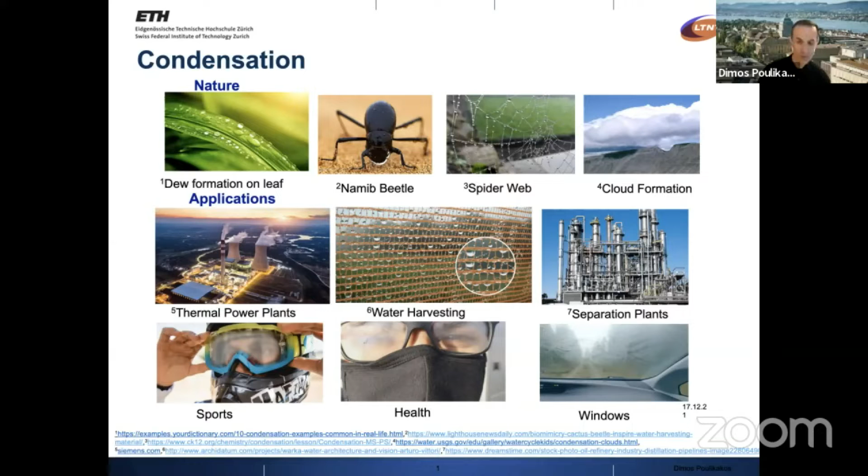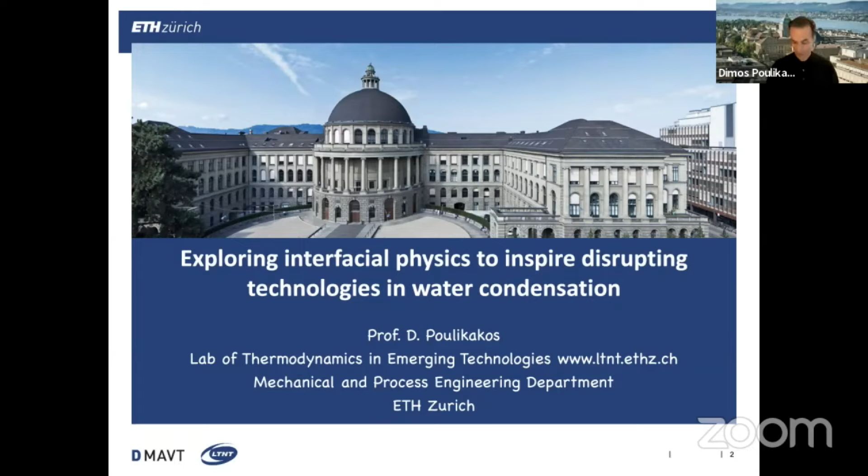Therefore, in today's talk, I will discuss the physics of condensation and how we learn from that physics to develop effective technologies for water condensation. I have three aspects in my presentation. The first deals with the broad area of power generation or industrial condensers, where the goal is to maximize heat transfer during condensation, and the mode of heat transfer that allows this is dropwise condensation.

The second topic is a completely different application. It refers to the big problem we have now, and will have more of in the future, of water scarcity on the planet. Here we see how we can utilize water in the atmosphere, harvest it, and combat this issue.

The last problem is one where condensation is really not wanted, but we have it whether we like it or not, and that is condensation on objects we want to remain transparent. There I will show how we develop technologies that ameliorate or avoid condensation.

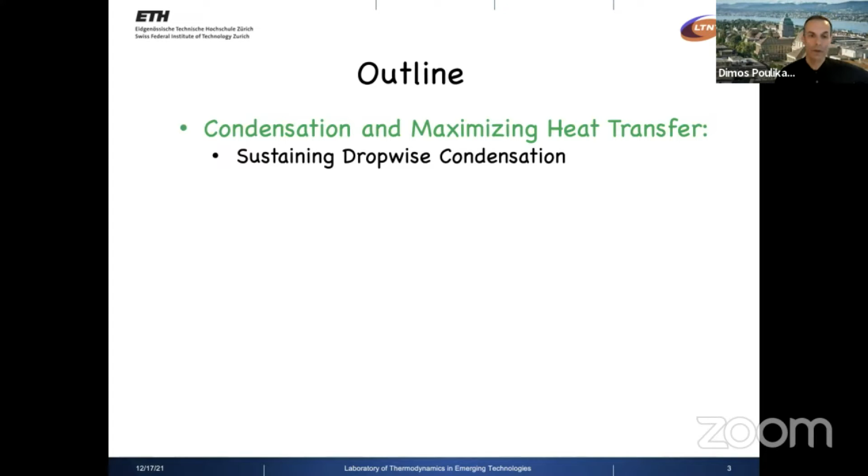So let's start with the first topic, which we're all familiar with in the general area of heat and mass transfer: maximizing heat transfer and sustaining dropwise condensation.

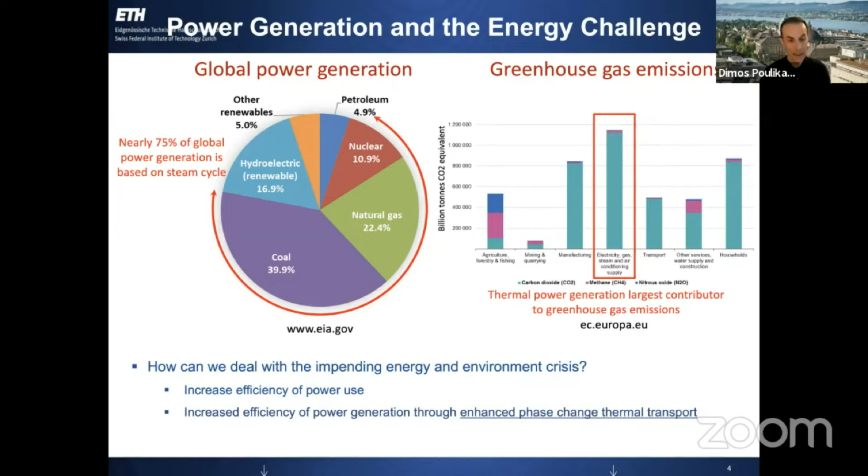Condensers come with certain requirements, of course, many of them. One very important one is that the surfaces we're dealing with are metallic surfaces, so one can forget about PDMS or silicon surfaces that we use in the laboratory and so on.

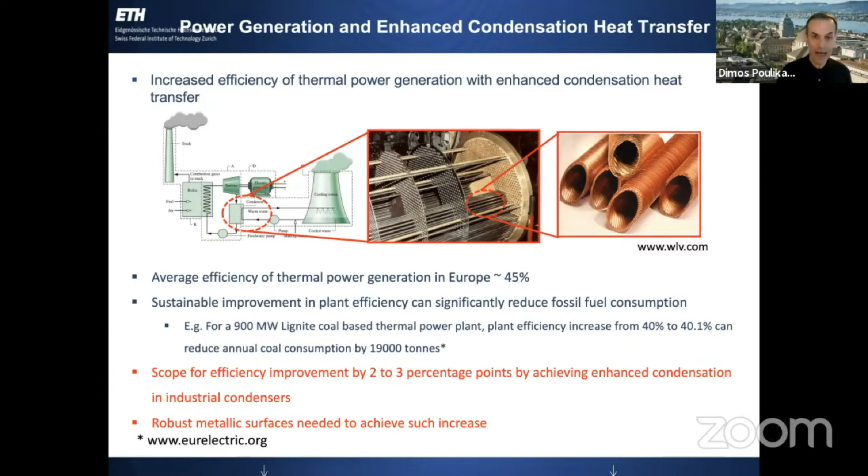And then, of course, the process has to be robust because they have to work reliably for a very long time. Now, what we are targeting here from the standpoint of condensation heat transfer is known to perhaps most of you in the audience, because condensation on the surfaces in this example can occur as a film. Now this film is moving downward and you don't even see it, or dropwise, that is, droplets are formed on the surface, and they, in a vertical configuration, are removed by gravity.

In a flow configuration where steam flows on top of them, for example, they could be removed also by shear forces, but when they're removed, fresh surface is generated and the condensation is enhanced. So in that respect, this is a much more favorable effect than film condensation, where the film adds thermal resistance between the colder surface and the steam on the outside, and that of course reduces performance.

And the effects that we're looking at are those of hydrophilicity. As you see, a droplet spreads nicely on a surface, and then eventually, if the droplets spread, they will generate some kind of a film, right? This theta angle is small for philic surfaces, and the other extreme is where the surface, so to speak, is more phobic to water, and the droplets tend to bead up, or the theta is larger than 90 degrees.

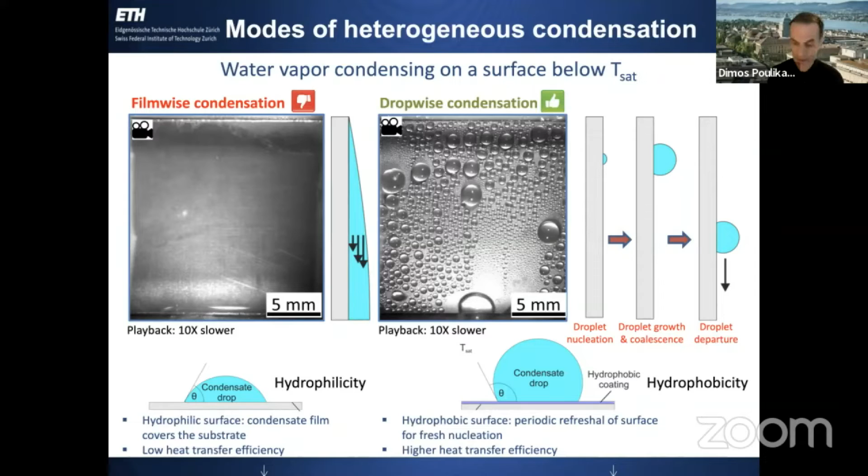You can go to the other extreme, 180 degrees, where the contact point theoretically would be only one point. That is also unwanted, because if the droplets do not touch the surface, then we will have no condensation. So the question is how do you reach a happy medium in between while having sustainable dropwise condensation. So the issue of hydrophobicity and perhaps superhydrophobicity is very relevant.

Surfaces that cause hydrophobicity, and in particular superhydrophobicity, are not smooth surfaces, they are rough surfaces. They became very popular about 10 to 20 years ago when they were observed on plants, like the famous lotus leaf that shows superhydrophobic behavior. And as you can see from the simple system of a droplet that I show here, for superhydrophobic surfaces the contact angle theta is much larger than 90 degrees. 0 would be a film, and 180 degrees would be like a ball on a hard surface, which you also do not want.

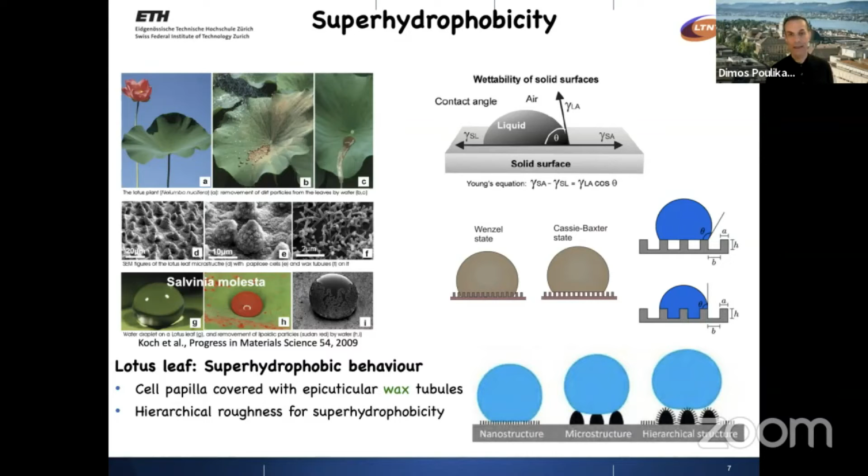And of course, nature does it very well for its functionality. As you can see here, on this plant, there is beautiful superhydrophobic behavior based on this sort of two-level roughness. You see like an arm, a micro arm, and on top of this, what I might call fingers, and then of course the droplet sits at the tips, at the fingertips of this structure here.

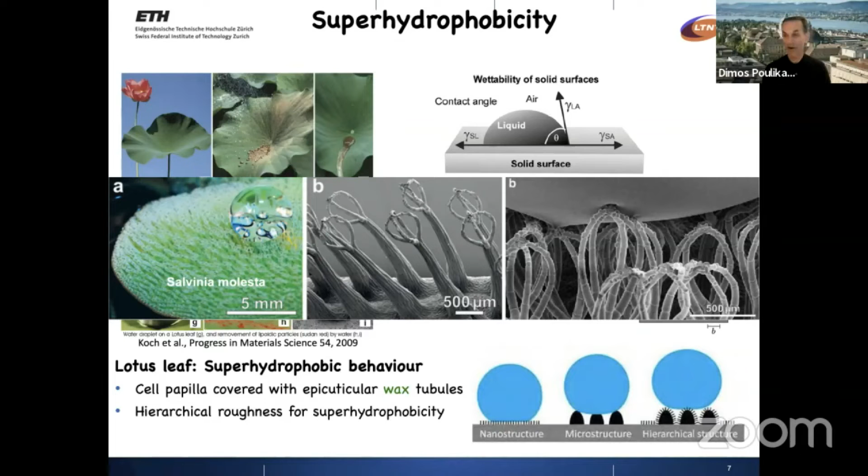But of course, then that shows you at the same time the fragility of these fragile structures. Also the fact that, even if they're not fragile, pressure can push the droplet through these structures, impale it, and the functionality is lost. So there are a lot of challenges in going from an inspiration that you see in nature that works well for the application in nature to an engineering problem where we have a lot more stringent requirements. And that is, of course, the challenge of the entire thing.

So then, basically, what we want is to maintain a desirable phobicity. We want these droplets to roll, and for that you need to have a superhydrophobic surface. Now, what is a superhydrophobic surface? That is also roughly defined. Let's say here that this angle should be about 150 degrees, maybe 160 degrees. And then, if you tilt it, the difference between the receding and the advancing contact angle should be relatively small, let's say below 10 to 15 degrees. If those two criteria are valid together, then you have a surface that basically gets rid of the water easily. You can call it superhydrophobic.

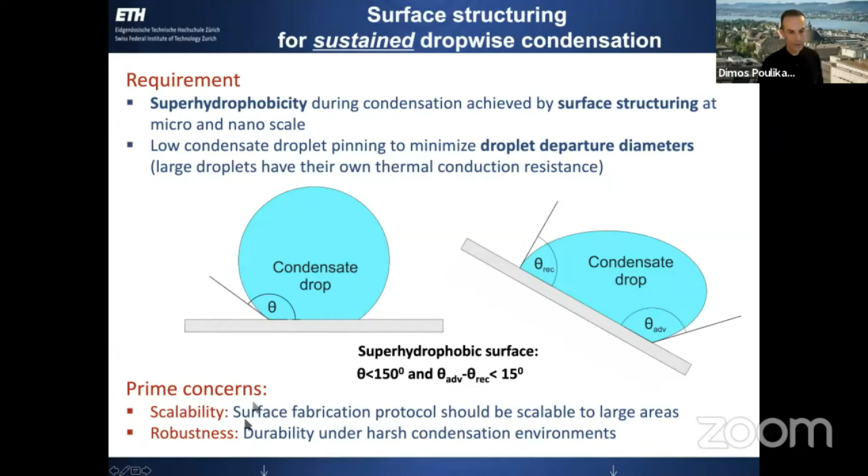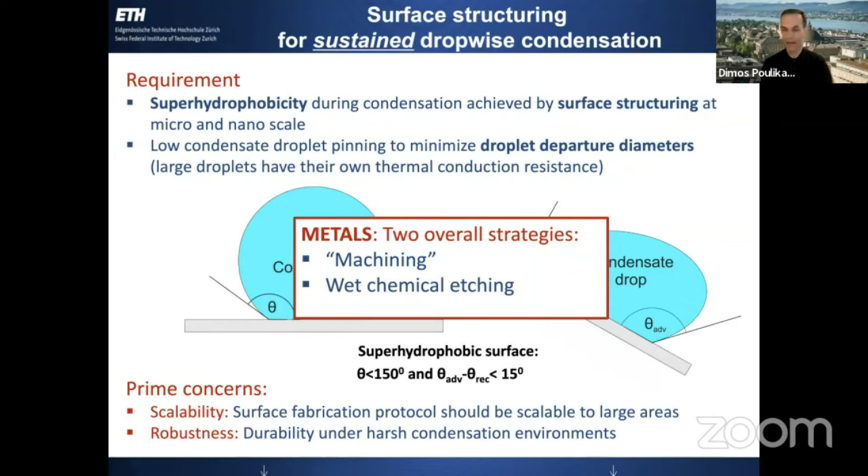We need scalability, we need robustness, and we need metals for the first part of my talk. And therefore, I will discuss two strategies on how to create structures like that on metals. One is simply machining. And the second is wet chemical etching, but both of them come with a rationale, with an engineering thinking as to what you get out of the surface to get the superhydrophobic behavior that you need.

And when it comes to machining, an interesting concept is one that makes a surface that has cavities like the one that I show here, and it is hydrophobic or superhydrophobic, so that when vapor condenses, unlike classical superhydrophobic behavior where you have water sitting on top of those structures, water nucleation tends to take place at the bottom of this cavity. So it's a lot more challenging to deal with when you condense. And then it keeps growing, and you really want to design the structures rationally.

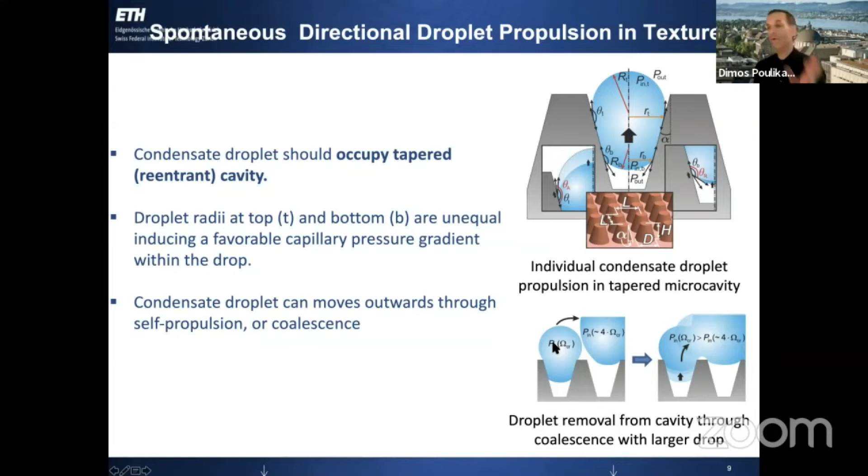So you have a behavior like this, where as the droplet grows, there is a capillary pressure difference within the droplet because of the different curvatures imposed by those reentrant cavities designed in the roughness, so that as it keeps growing, this becomes bigger and pushes the droplet out. And at the end, you might have this being pushed out all by itself, but it could be helped by coalescence with another droplet in the surrounding. If there is an event like this, the smaller droplet will empty itself into the bigger droplet because of the so-called Ostwald ripening effect. And then, with that, the water will move out of the cavity.

So we look into many ways of how to texture the surfaces. You can do nanotextures, as you can see here. This is a chemically obtained nanotexture with chemical etching in aluminum, or with boiling. You can simply boil aluminum and you generate structures like this. Of course, you have to have a protocol for this. You can machine grooves on this.

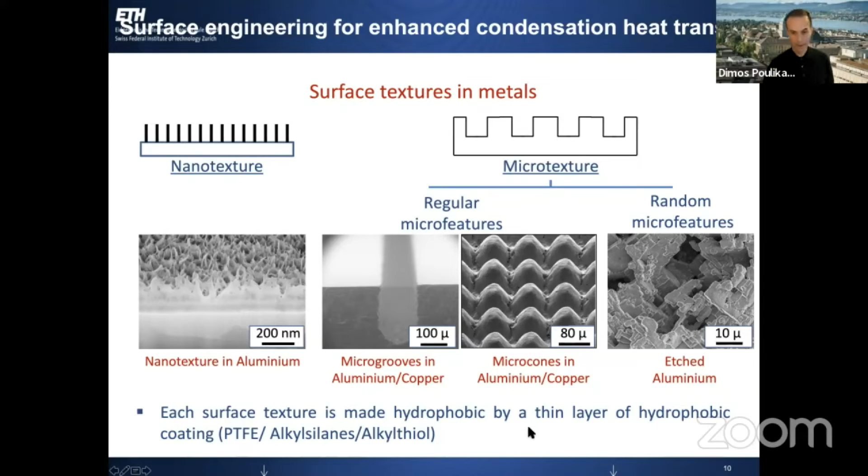You can generate these reentrant structures that I discussed that will help droplets move out of the structure with laser machining, or you can achieve the same effect, less challenging and easier to upscale, by some kind of chemical etching that, when you look at it all together, does provide the surface with the kind of effect that I discussed earlier. And the surfaces have to be treated chemically at the end of the day. That is the last part of the process to make them superhydrophobic.

So we worked on this, and in particular, my old PhD student and postdoc, and now assistant professor at IIT Ropar, Chander Shekhar Sharma, worked extensively on this, and he showed a very nice process, easily upscalable, where you could create this kind of a structure that has this reentrant nature.

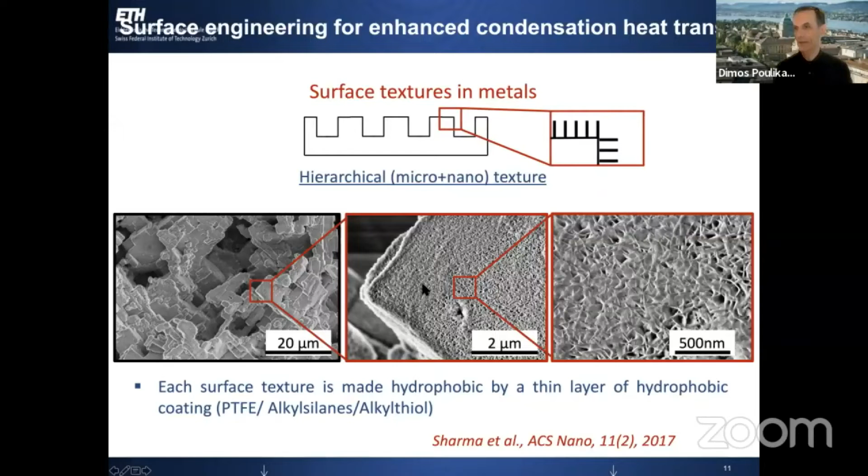It consists of larger cavities that are decorated. Look at this. This is 20 microns. That is 2 microns with a nanostructure, and working collaboratively, these structures do what I told you earlier. I'm going to skip this. Well, why not? Okay. And they're able to basically move the droplets out and generate a relatively early departure.

And you do want early departure because you see that we have an experiment here on a surface like this. Sorry. Okay. Doesn't seem to want to play.

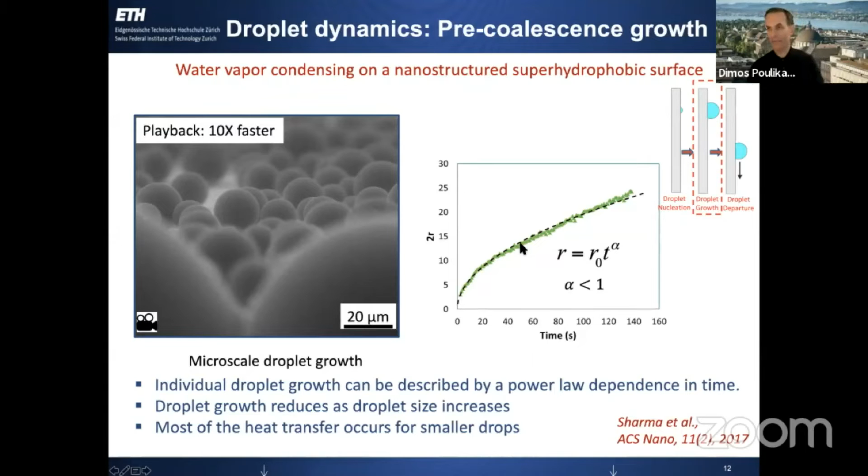Okay. Here we are. So you have these droplets that are created on the structure, and they keep growing and they keep coalescing, and they're all moving up. You see, they're ready to be swept off or roll off, right? And you do want early departure because it is for small droplets. I mean, the droplet growth is an exponent that is less than 1, and the early departure is where effectively the droplet growth is more effective for heat transfer.

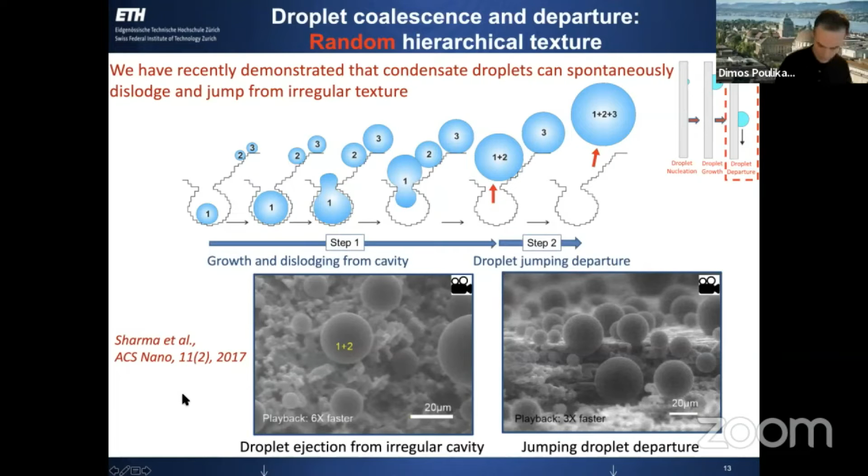You can do the same, of course, with nicely organized, regularly structured surfaces, which are done by a laser, followed by chemical treatment, as you see here, and then you see the same effect that I described earlier, where they grow from the cavities. Those are well-organized cavities, of course, and you see how they coalesce and keep coalescing. Then the entire thing would be out and fall off either by gravity or by an incoming stream of steam. So they work very well.

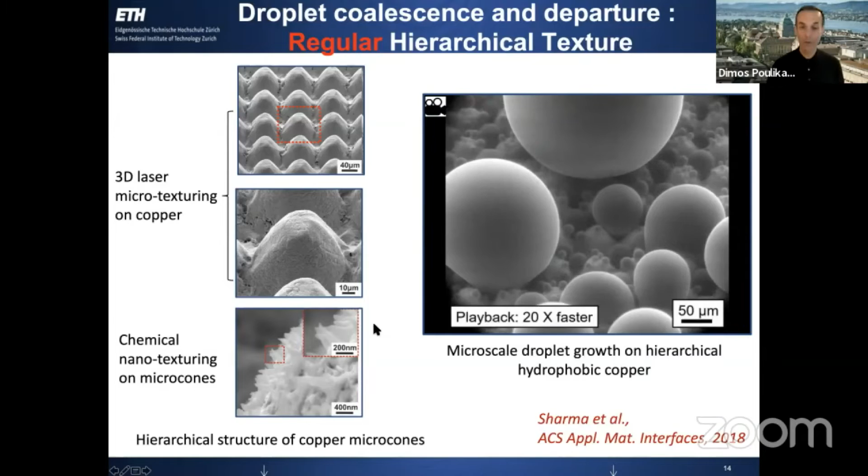And here's an example of what they do to heat transfer, because you see we do a lot of work on droplets. You can see published work on generation, condensation like that, but you rarely see heat transfer coefficients. So the visuals are beautiful, and we stop at the visual, but unless we measure heat transfer coefficients, we haven't done the job. So Sharma and his co-workers here went ahead and looked into careful experiments on the heat transfer coefficient, and you can see now the effect using these example surfaces here in this presentation.

I chose the regular hierarchical texture, and you see how you can increase tremendously the heat transfer coefficient. I compare with the hydrophilic surface, let's say copper or aluminum surface with no structure and philic, and then the best you can do, so to speak, in that study at least, the hierarchical hydrophobic surface. Compare the two, you have a 700% increase in the heat transfer coefficient. So that could be a successful way to go, provided, of course, that the surface is robust.

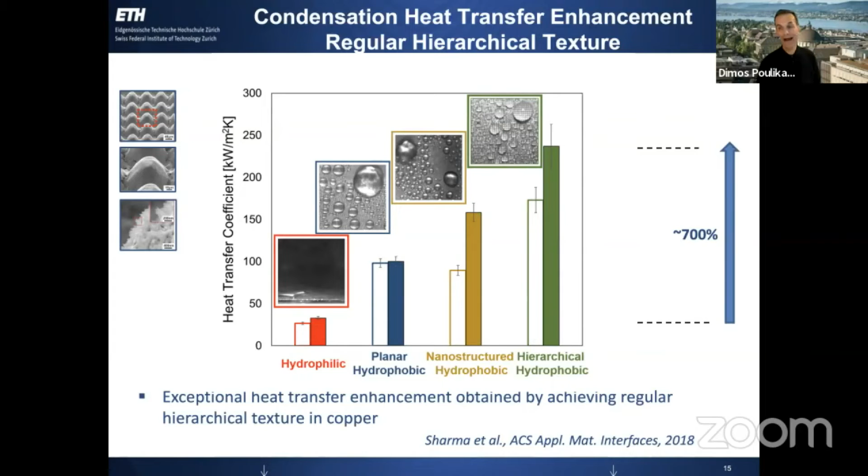And we've done some robustness experiments here, very challenging experiments. We have a setup in the lab where effectively we test the surfaces with hot steam at high velocities, much more challenging conditions than the real applications in industrial condensers, where you don't have that at all. You don't have any high velocities, and you have a vacuum.

Okay, so if you have a vacuum, a significant vacuum, then of course it's a lot less challenging for the surfaces. But we cannot sit there for years and do it. It's doable, but very difficult to do the real time experiments. So therefore, we do accelerated experiments with a lot more challenging conditions.

So you see here that we started with superheated steam at 111 degrees with a velocity of 3 meters per second on the surface. And you do have clearly dropwise condensation. You don't transition to film. That goes up to 6 days. After this point, we switch to 9 meters per second, a very challenging condition.

And you can go for 11 days, almost 2 weeks, so to speak, maintaining the hydrophobic dropwise condensation behavior and the heat transfer coefficient. So that's sort of a rewarding result.

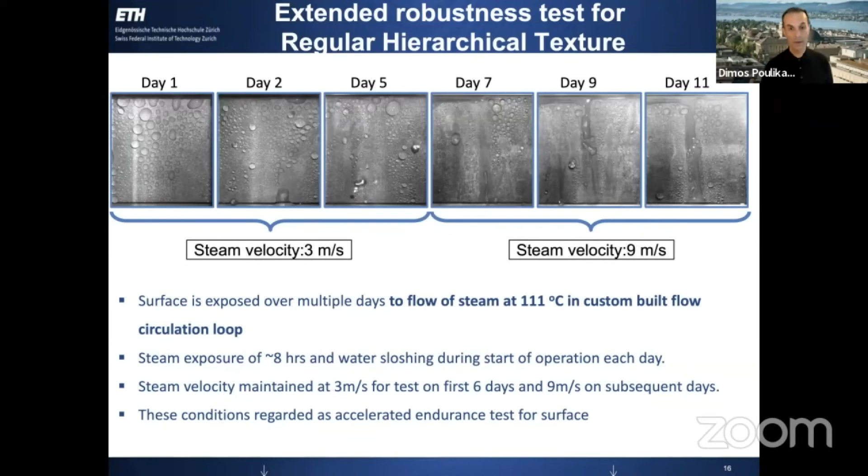Now, I'm going to close this first part of my talk with going to a different kind of a surface. Those are not anymore rough surfaces. Those are liquid-infused surfaces. So this is another approach where the contact angle of the condensate, so to speak, the droplet does not have to be very large, but the droplet's extremely slippery.

So those are liquid-infused surfaces, and usually they're done by, imagine a very thin deposited roughness or carpet, so to speak, on the surface that is infused by the liquid, and the condensation occurs on top of it. So since it is infused by the liquid, there's very little friction and the droplet slides on the surface. So a bit of a different approach. And there is a lot of work that's being done on this.

And our contribution to this is the following. A big disadvantage, in addition to the fact that you have to infuse them with a lubricant that is non-miscible with water, and there's issues with that, these layers are insulating because the liquids used as lubricants are not very conductive; you cannot avoid that. They're usually of low thermal conductivity. And the same is true with many of those porous structures that are generated on the surface.

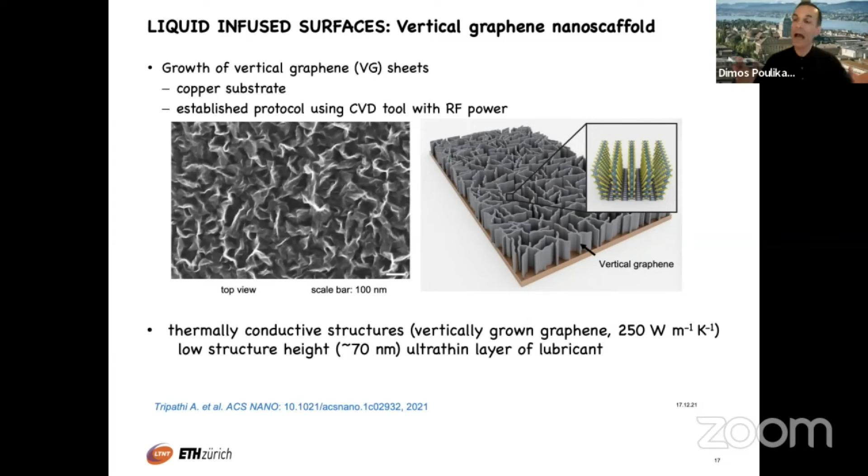In particular, the second effect is really detrimental. I mean, unexpectedly detrimental, because you say a micron or two, what harm can it do? It can do a lot of harm. And as you can see in the second slide, that is another view of a copper substrate with a vertical graphene on top of it, about 70 nanometers. And this is a typical lubricant that you see.

You see the conductivity of the lubricant is kind of unavoidably small, but there is a huge difference between our surface with that vertical graphene and the copper oxide, the state-of-the-art surface with which we are competing. And the resultant thermal resistances, and there is an interesting study on that within the same publication, is significant. The 2 micron copper oxide, because you cannot go much smaller than that, liquid-infused surface has a larger thermal resistance than our 70 nanometer vertical graphene liquid-infused surface by an order of magnitude. And that makes our surface a lot more favorable heat transfer-wise.

As you see from these results of heat transfer coefficient versus subcooling, the state-of-the-art liquid-infused surface behaves like I see here. This is the red. Even the pure copper oxide without the lubricant behaves a little better. And our surface, of course, is significantly more effective regarding heat transfer, because of its conductive nature, but most important, because of its thickness. So that's an interesting other way to go about increasing heat transfer in condensation.

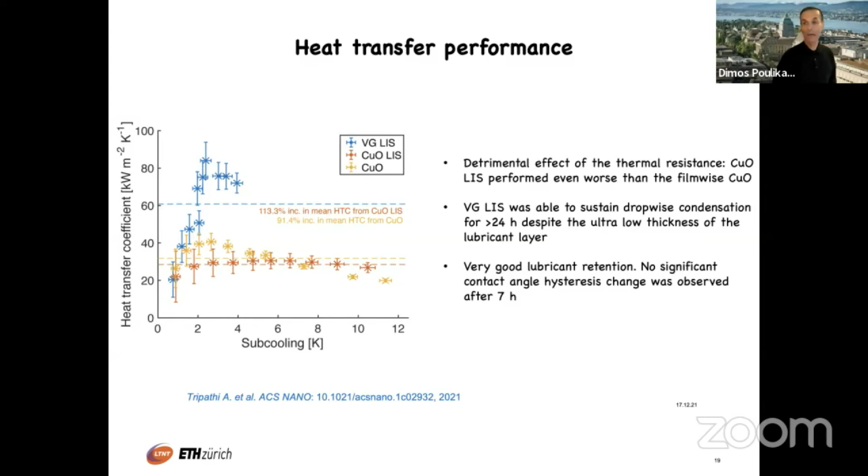You should always think about robustness as much as you can, and then you see how this surface operates with time. And the behavior you see after cumulative 3 hours up to 25.5 hours that we run the experiments is very good. The surface maintains dropwise condensation.

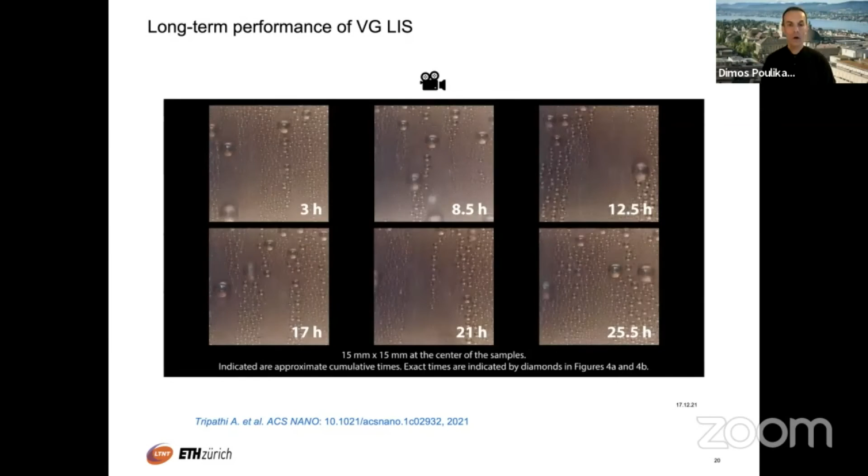So with that, I hope I gave you a flavor of some work that we do today, and it's done also by other groups worldwide in the area of dropwise condensation with an eye to maximizing heat transfer.

And then I'm going to move to the second topic, again condensation, but now the focus will be atmospheric water harvesting. And it's easy, of course, if you have a surface in the evening, you put it out, dew will form on it, because in the evening the temperature of the surface will be lower than the saturation temperature, and then effectively you have dew formation. A lot of methods rely on this when it comes to atmospheric water, but in our case, we'll show you how you can do that continuously, also when the sun shines on your surface.

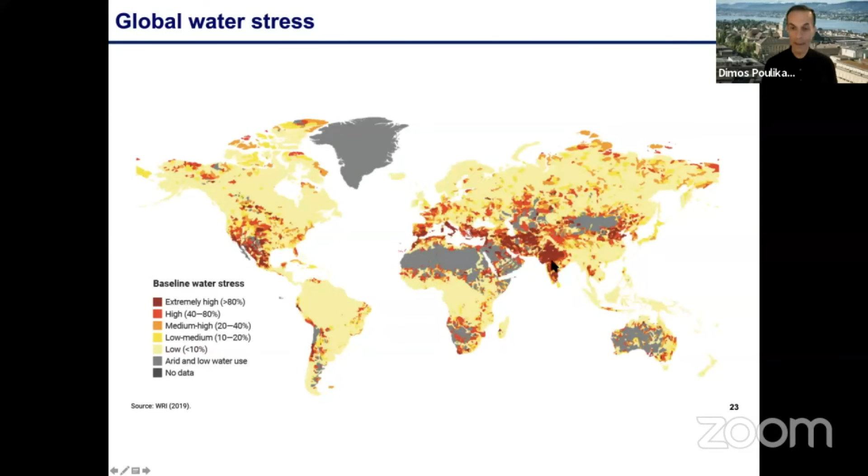So people have been looking into many ways of how to gain water. There are industrial desalination processes that I don't need to remind you of. But if you look at water per se, 0.5% of the Earth's water, if you count everything, is available for human consumption. And 40% of the world population is affected by water scarcity right now.

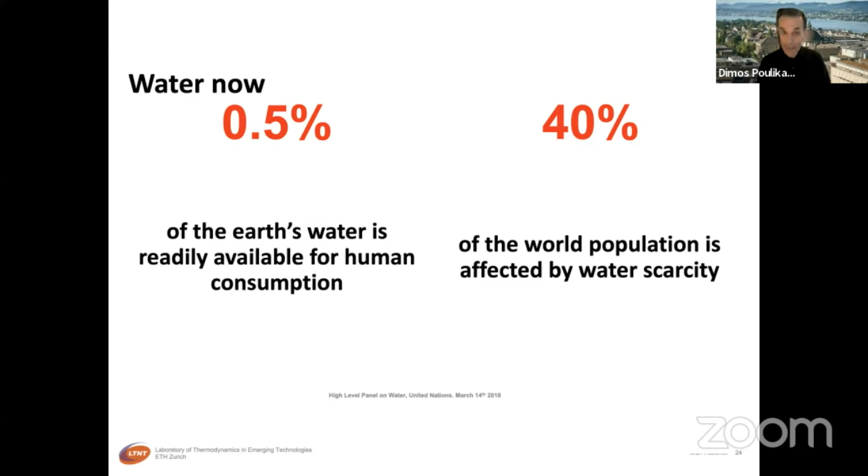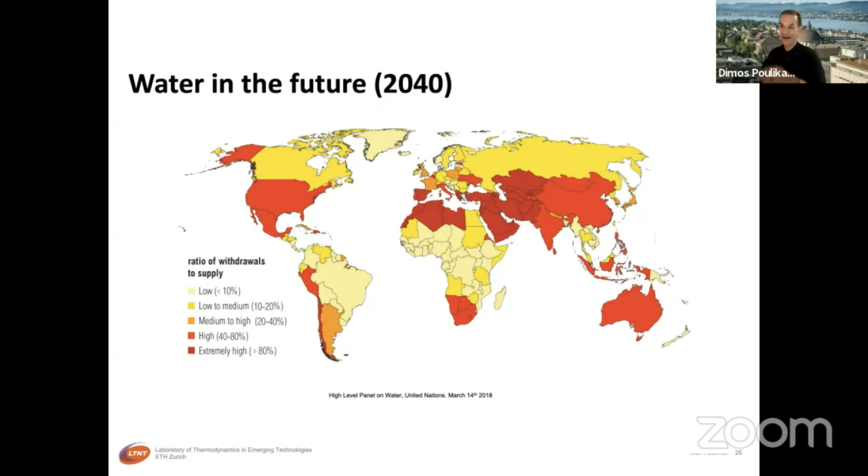And if you look into the future, the situation looks like this. There's a lot more red, which is, if you look at the ratio of withdrawal to supply of water, the situation will be a lot more acute, in many regions of the world, including India, that is hosting my presentation today. So therefore, I chose this topic because I thought it might also interest you.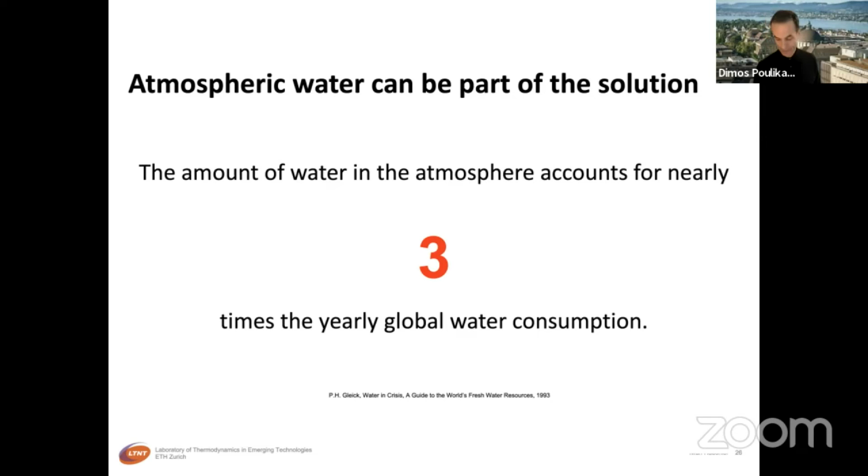Now, try anything you can. It is about a cocktail of solutions, so to speak. But the atmosphere could be a part of the solution, because the water available in the atmosphere is about 3 times the yearly global water consumption. So there's quite a bit of water there. So we can add this to our quilt of solutions to fight water scarcity.

And what I'm going to bring to the forefront here is the concept of radiative cooling. I'm going to come to this so-called infrared atmospheric window, which became very popular in the past, I want to say, 5, 7, 8 years, since the group of Fan at Stanford did a paper where they showed that there is this window, which was there, but not many of us were aware of it. If you look at the transmittance versus wavelength in the atmosphere, there is this window between 8 to 13 microns, where the transmittance is very high.

Now it is in the infrared, right? And the reason why this window is very important is that there, if you emit, there's no absorption in the atmosphere. The transmittance of the atmosphere is very high. And basically, you communicate radiatively with outer space. So effectively, if there were no other effects like convection and so on, at equilibrium, if you had vacuum in between, you would reach the space temperature within that window.

This window is limited on one side because of water absorption, because the presence of water in the atmosphere absorbs a lot of radiated heat, and on the other side, mainly because of CO2. So effectively, there is this window, and if we could design our surfaces so that they radiate energy through that window, then of course they could be cooled because the atmosphere allows that. If you have an emissive surface that emits very well, that surface would also absorb very well in the same wavelength range. But since in that window the atmosphere itself does not emit, there's nothing to absorb.

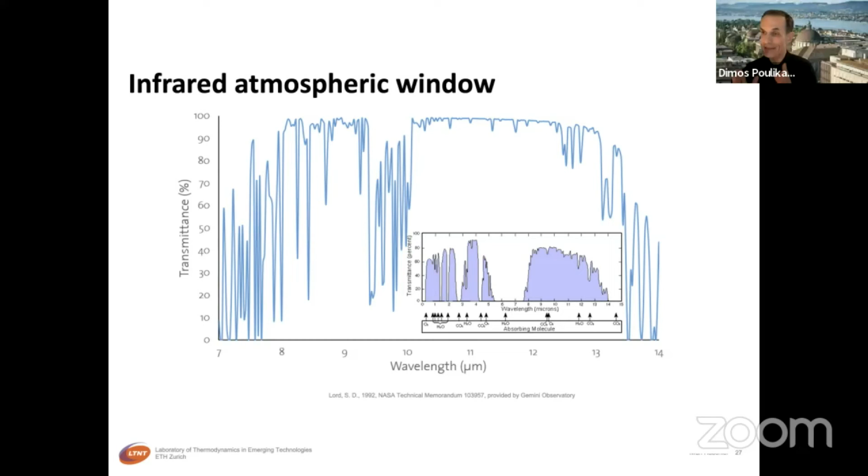So this window is a window of escape of thermal energy of the Earth toward outer space. So the challenge is now to generate surfaces that would emit in that particular window. And that's what we did.

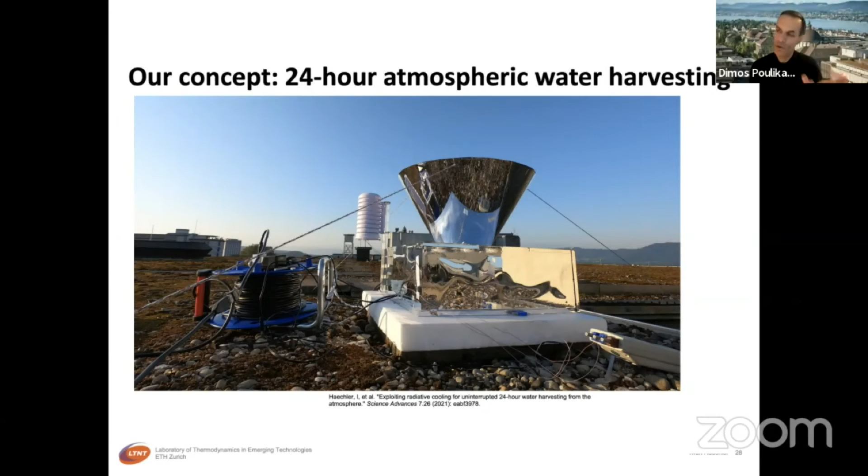And that's our device. Of course, a picture of a device, and I see a lot of papers—people send me papers. I act as an editor, and they have like 10 photographs in the paper. Don't send me that; maybe one photograph is enough, because it looks nice, but it doesn't tell me much quantitatively, as much as a nice diagram like this. The concept is that I make a device, and this device is not very simple, although it looks very simple, and it is, but it is very affordable and you can make it rather easily.

But scientifically, it's not a very simple device. This device is for cooling, but also for condensation. It consists of a selective emitter, as I told you before, that has to emit through that window. At the same time, it has to avoid everything else—reflect it—because if I want to use it during the day and the sun shines upon the device, I want to get rid of all that. It should reflect the sunlight outside this window.

And of course the radiation is rather complex. There is angular, not only wavelength dependency, but also angular dependencies. And there is conduction and convection in the atmosphere. A radiation shield is needed to ameliorate all these effects. There is an insulated film here to ameliorate convection from the atmosphere, and also to ameliorate direct condensation on the surface.

And there's a condenser on the other side of this, where this surface gets cold even during the day—even if the temperature outside is high, this will be cold and will generate condensation. So how do you do all that?

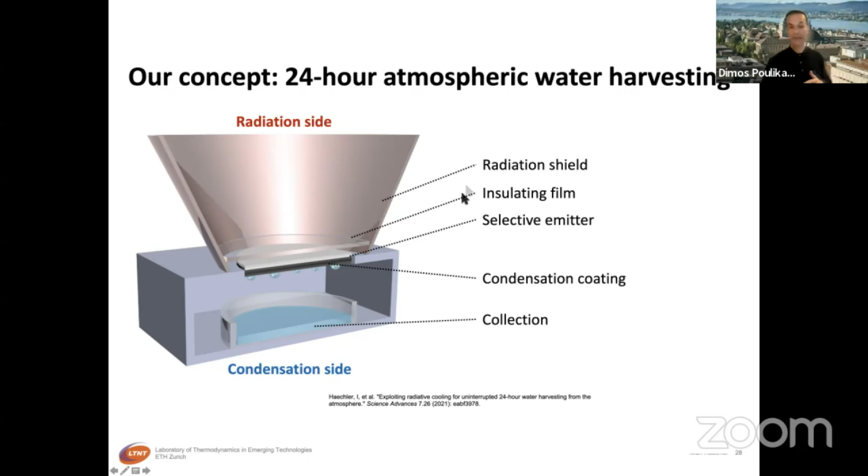So the first thing I want to discuss, of the three parts you have to design separately: the radiation shield, which is a very important aspect people miss a lot of times. You have to design the selective emitter, and then you design the condenser separately. So a few words on the selective emitter.

That is actually not that difficult to make. You go to the underside of the glass, so to speak—that would be the underside here where the condensation takes place. And then you deposit a mirror effectively: it's a silver nano layer sandwiched between two chromium layers. The first one helps adhesion, and the other protects against oxidation. With the PDMS on top, you're pretty much done.

And this emitter, if you measure its emission, it looks like this—it's extremely high in the atmospheric window, about over 0.9 emissivity. The absorptivity would also be high in this wavelength, but there's nothing to absorb from the atmosphere because that is a transparent window of the atmosphere. That is the secret. So that works—it's pretty simple to do and works very well.

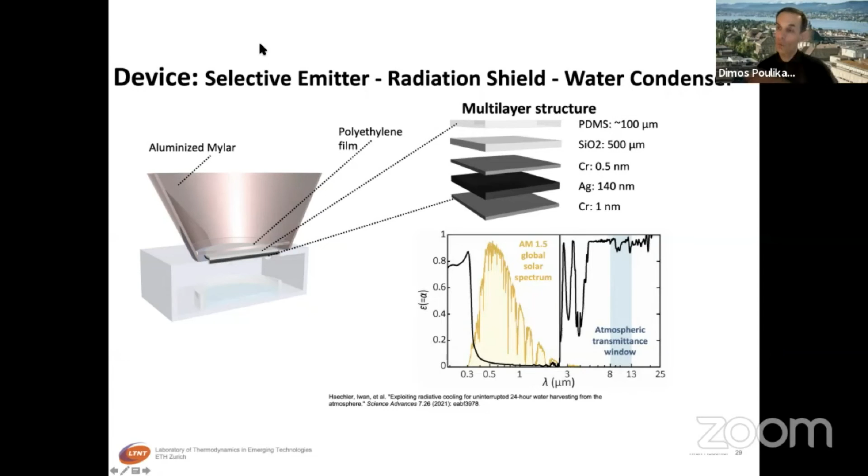But the story is a lot more complicated, because I'll tell you why you need the radiation shield. The radiation window works in the direction normal to the surface, but radiation has an angular dependence. So this high emissivity of the mirror works in the normal direction, but not when the angles are very small. So you have to protect the emitter from those effects.

And of course radiation is not the only story here. We are all in heat transfer, and we realize there are other effects. So if this were to operate effectively, you would have Q-dew, which is basically the heat released during dewing, because you want to collect the water at the bottom of this device. We want to maximize this with the cooling I discussed before, radiative cooling to deep space. But there are negative effects: the radiation of the sun that hits your device, and atmospheric radiation at other angles. So it's not only the vertical direction we consider, but it comes from everywhere.

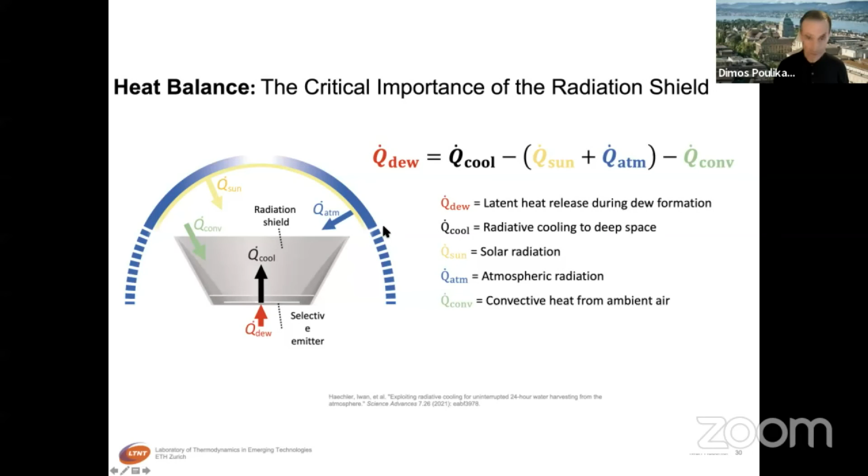And then, of course, there are convective effects, and you have to optimize this by taking into account all these effects. That is why one needs the radiation shield, if nothing else, that I show here. And this radiation shield should block the low angle radiation, and direct all the sun radiation that falls on your selective emitter through this mirror effect, reflect it away, and also if it reflects on the sides, direct everything toward the theta equals 0 angle.

So it is a rather intricate, but for us heat transfer connoisseurs, very doable problem in designing this shield. I'm not going to give any details, but we've done this, of course.

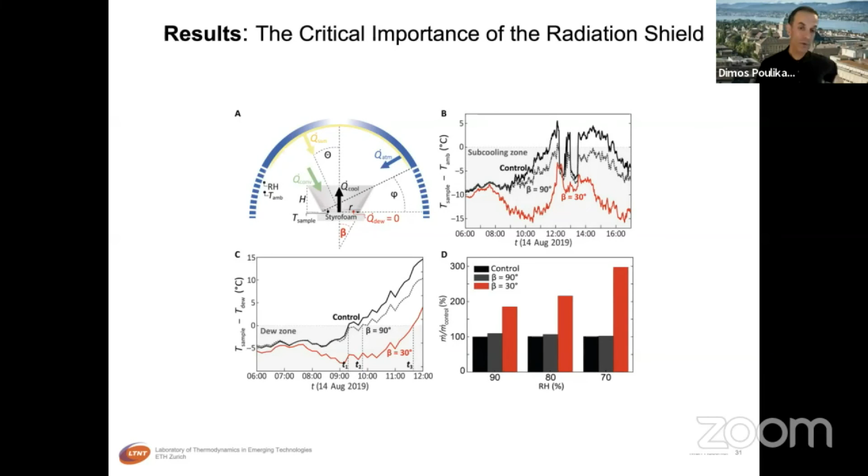And then, of course, you have the condensation - coming back to our main theme today. And at the very end, one can put a superhydrophobic layer. We have developed, with a process you can see in this paper, a very simple, very easily upscalable approach, combining PTFE, carbon nanofibers, and dichloromethane, which is sprayable. You can spray this material on the surface, and it has fantastic superhydrophobic behavior.

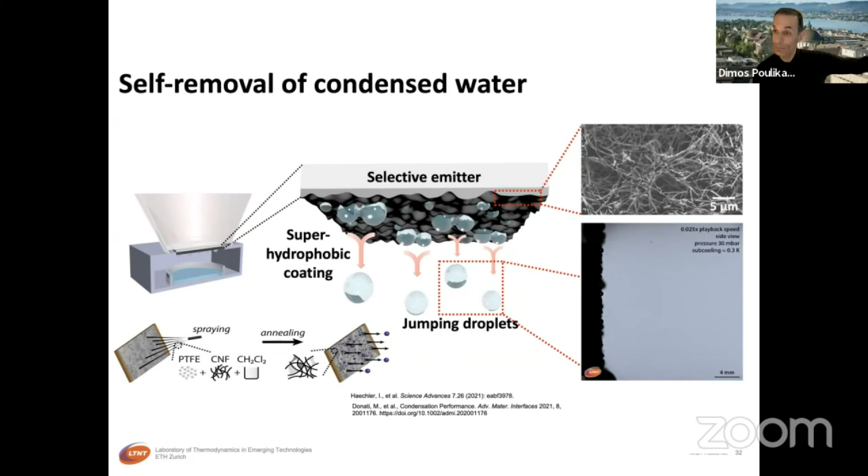And then the performance is really outstanding, as you can see. We have remarkable mass fluxes. First of all, throughout the day - this is 24 hours from here to there - you collect water. Even when the sun is shining, you have a cold surface collecting water underneath. Throughout, practically except for this little period, 24 hours, you collect water.

And then, depending on the humidity - this is a real life experiment, not a laboratory experiment anymore, it's on the roof of our building - you can have very high performance. You see some results here for a relative humidity above 90%.

I want to compare with works of others. It's very difficult because the conditions are always different. But what I compare with is the theoretical limit of this technology, which is the black body, which assumes 100% humidity, no sunlight illumination, and no convective heating. And if I compare with that, the limit is 59 grams per square meter per hour, whereas we're able to reach, arbitrarily, on this particular day in August, 52 grams.

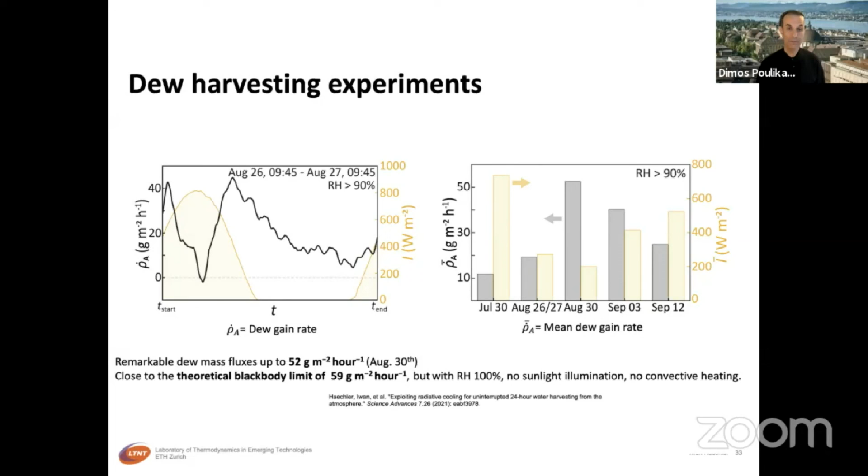So therefore, this is a very impressive result. If you can accelerate, because in about 5 minutes the next session is to start.

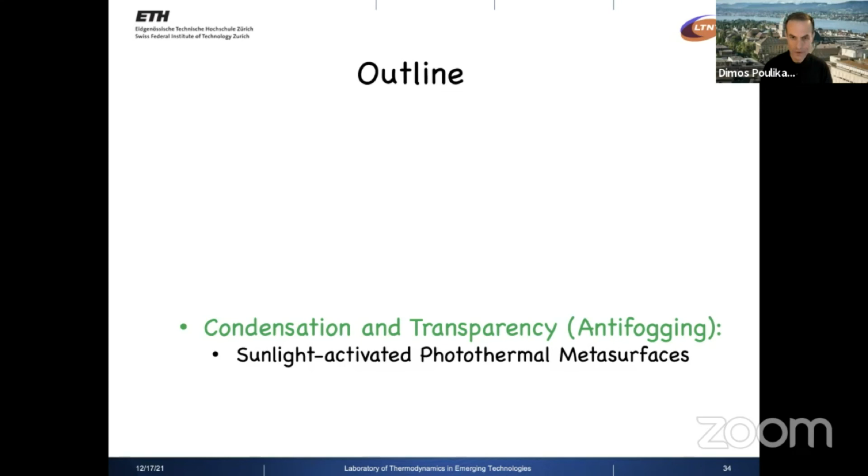Okay, so then the last topic is that of condensation and transparency with respect to anti-fogging. And I will take 5 minutes to basically show you the salient features of this.

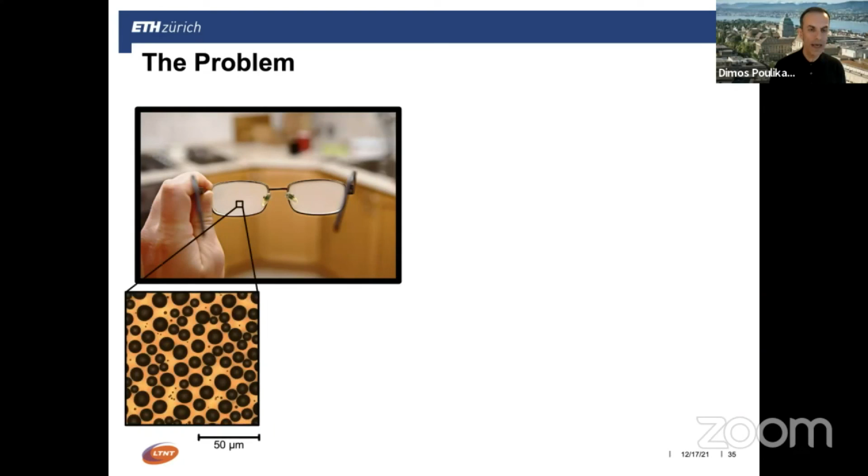The problem is, of course, on spectacles you have condensation in terms of small droplets because of temperature changes or increase in humidity. And then the sunlight is not going straight into our eyes, it is scattered on those droplets, and it comes in a scattered form into our eye, and our brain sees that as fogging.

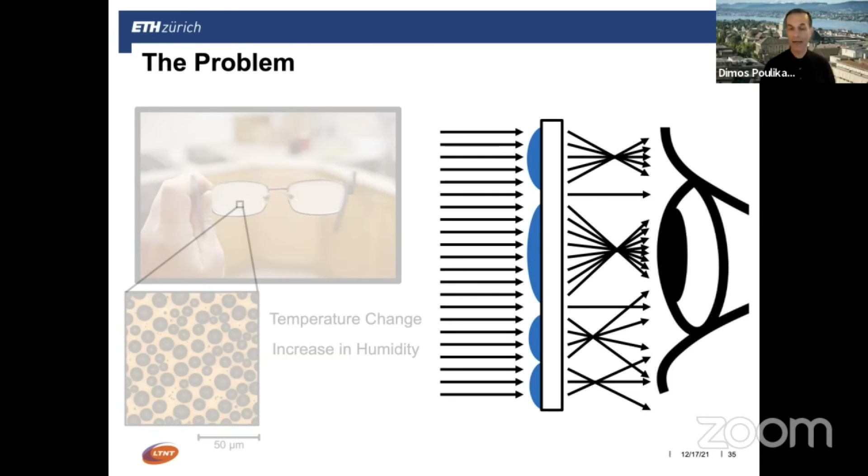So it is a very undesirable effect. And there are some technologies meant to combat this effect by making the surface superhydrophilic, so you have a thin layer instead of having droplets. But those have very limited success and are very transient.

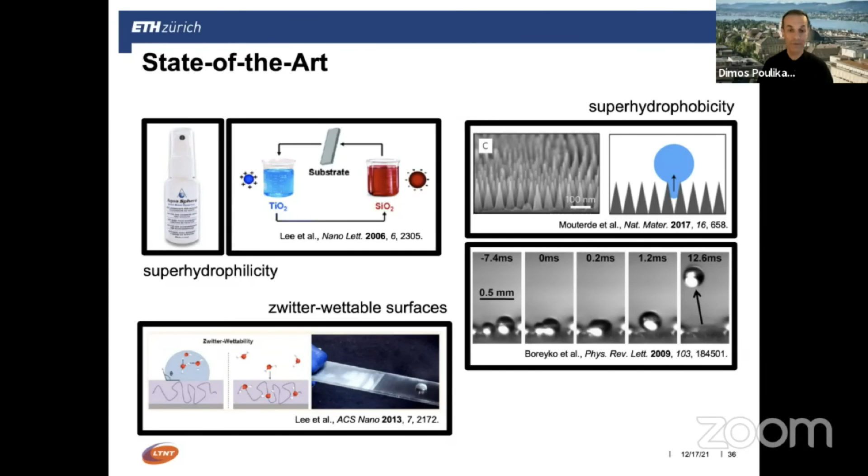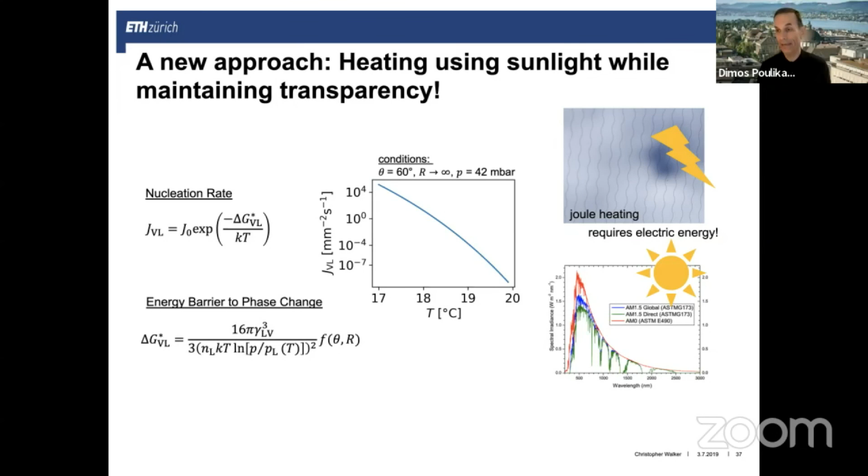So we try to use thermodynamics, use the sunlight to avoid this process by heating the transparent surface while maintaining transparency. Because if you paint it black, you will absorb the visible light, and we don't want to absorb the visible. We want to absorb in the infrared. So the trick is to have transparent surfaces absorbing only in the infrared, elevating their temperature naturally, without any Joule heat or anything like that, and in that respect, ameliorating condensation.

I'm going to skip the way we did it. We had a way we used the plasmonic effect. Unfortunately, I have no time to discuss this.